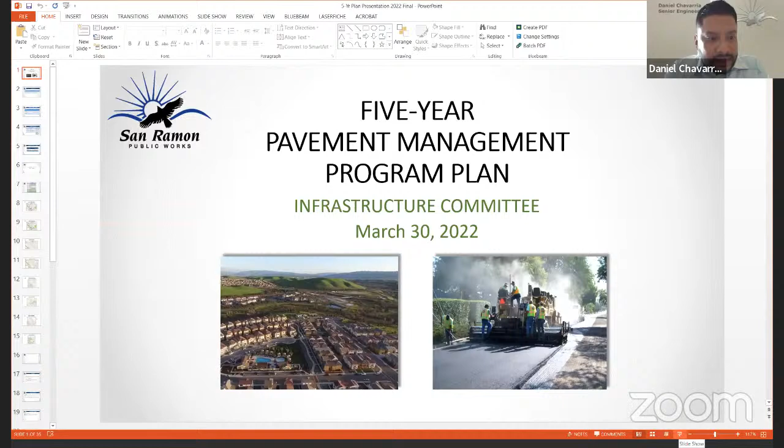Thank you, Councilmember Armstrong. This is Daniel Chavarria, Senior Civil Engineer, and with me presenting is Susie Edwards, Associate Engineer. And I'm pretty sure that Robin Bartlett will chime in as needed and any other staff member. If you can go back, Susie, to the first slide.

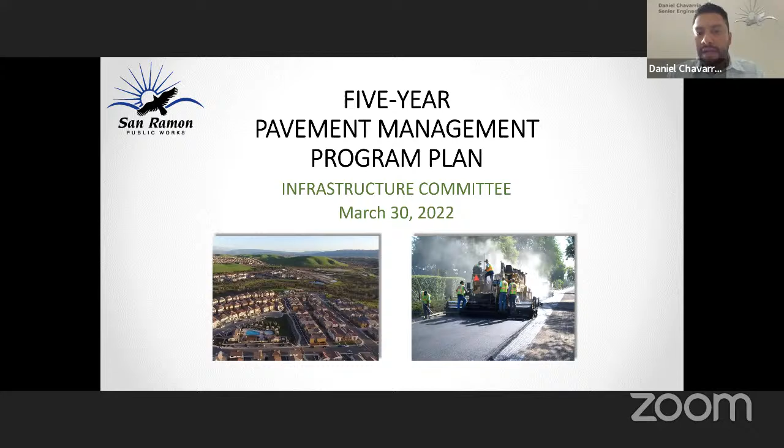Thank you. So today we're going to talk about the 5-year pavement management program plan, what we in short call the 5-year PMP. In previous years, we have started this presentation giving a quick pavement 101. But this time we're going to skip that because we have done it for the last 4 years, and since we have repeat council members in the committee, we think that we can skip that. But if we need some refresher at the end, we have some slides. So we're going to go straight to the 5-year plan. Susie, can you go next, please?

So as part of this plan, we have incorporated some opportunities that we have taken advantage of. Some of them are related to funding, specifically a cash flow from the State Transportation Improvement Program, STIP, that allowed us to do some preliminary work for future years in the last 2 years. We also got some infusion of funds from the 2019 Certificate of Participation, COP.

Another opportunity that has allowed us to get some savings is that city staff has acted as a general contractor by hiring subcontractors directly and avoiding the markups that a general contractor would charge us. That has not only provided us savings in funding, but also in time, and it has provided us flexibility, and has made the bid process a little bit more attractive for contractors in the way that they don't have to wait for subs to provide them quotes for our projects when they are very busy providing quotes for different projects all over the Bay Area.

We have also transitioned to do the plans and specifications and engineers' estimates in-house, which also has saved some funds and saved some time. We have applied new treatments for the city of San Ramon that have provided us savings, and we have taken advantage of some grants, federal and state, for our pavement program.

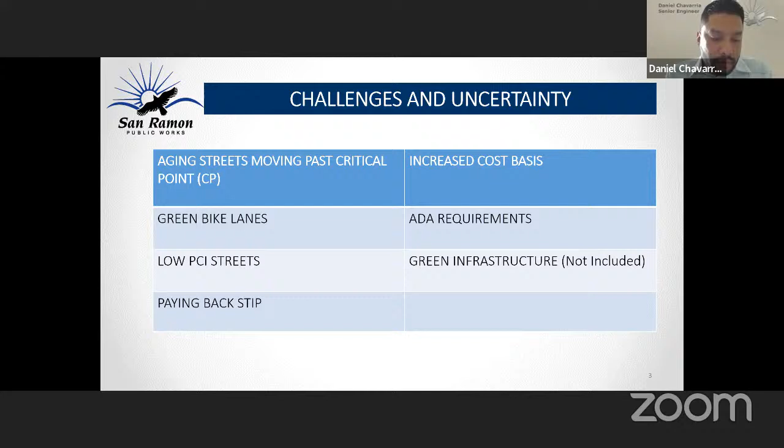And at the same time, even though the STIP was a good infusion for cash flow, we now have to pay it back. And for that, we're using Measure J, so for the next few years we won't see the Measure J funds in our paving program. Next, please.

You will see some maps further in the presentation, and here's a little bit of explanation of the legend that you're going to see. We have different categories of treatment: light maintenance, heavy maintenance, light rehabilitation, heavy rehabilitation, and reconstruction. Reconstruction is one category that we don't use in the city, except for the Alcosta Boulevard pavement project that we did last summer. That was the full depth reclamation that is also called out in this table.

But if we go one by one through the categories, when we talk about light maintenance, we typically talk about slurry seals and microsurfacing. For heavy maintenance, we talk about cape seal and a slurry seal with dig outs. Same thing with microsurface with dig outs. For light rehabilitation, we talk about overlays and rubberized cape seals with dig outs. And for heavy rehabilitation, we talk about overlays and thick mill and fill. Next, please.

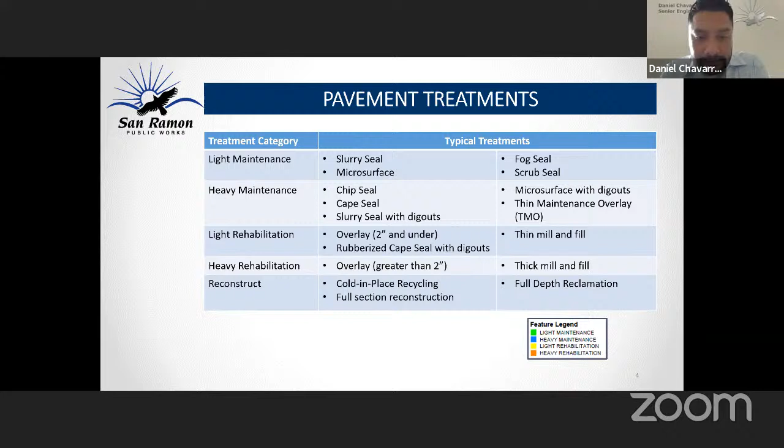The current conditions for the San Ramon pavement system, you can see in this table by functional class, arterial, parking lots, collectors, and residentials, how many centerline miles we have for each of these classes, and the areas in square feet and their participation in the overall system. You can see the percentages, where 57.6% is residential, which makes the city, of course, mainly residential, but also arterials are 26% of the system. The average current PCI for the city is 78, and you can see per functional class the PCI that we have.

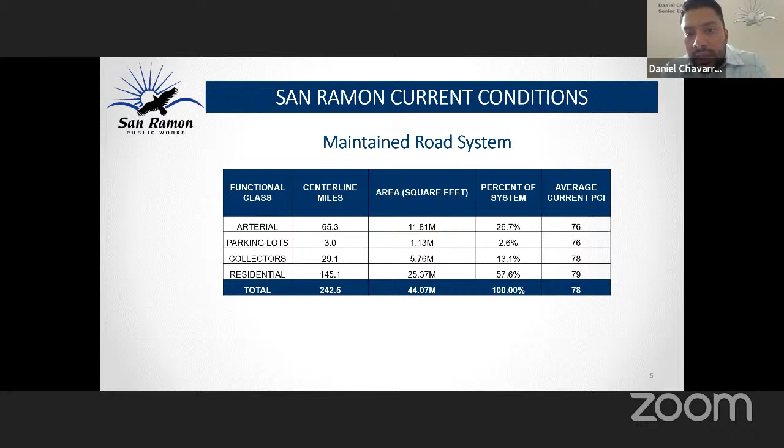Next, Susie. Thank you. Moving on with the current 5-year plan with the 2022 update. The first slide, and I know it's a lot of information in that table, is mainly funding. I want to point out that these are projections. None of these numbers are actual yet, except for 2022 and some of 2023. And as I mentioned before, we don't know yet how the increase in oil and gas prices is going to impact our program. You could say that with the gas being more expensive, we could collect more money, but there are also some measures that the state or the federal government can take that might change things around.

The two things that I want to point out in this table are that the main funding sources right now for the pavement program are gas tax, and the second one is a refuse vehicle impact fee. You can see the gas tax below the first blue cells, in the first white cells, and you can see the total gas tax there. And below that is the refuse vehicle impact fee. Those two funding sources are the main ones right now for the pavement program. No general funds. And for Measure J, we won't receive Measure J funds for a while because we're paying back the STIP loan.

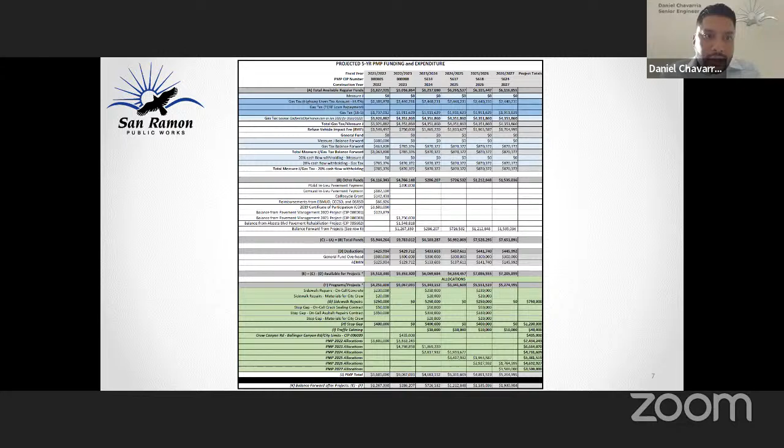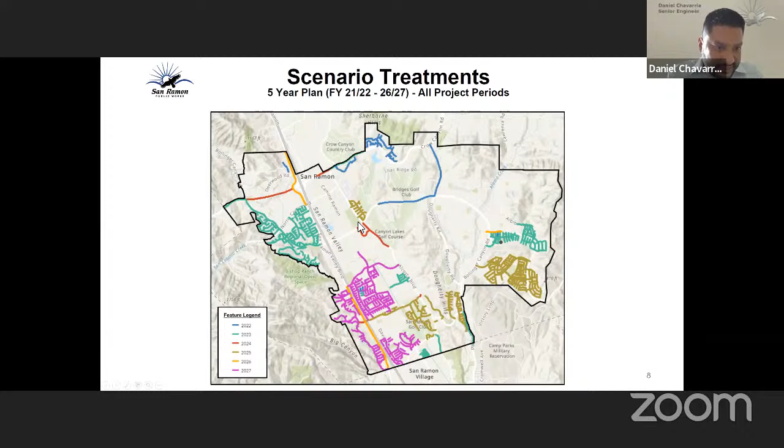Okay, thank you. Perfect. So Susie will take over here for the maps. Go ahead, Susie. I had to unmute myself. And sorry for any feedback that you guys get to listen to.

So I'm going to go over the 5-year plan, the projected periods, and pretty much we've added on 2027. There have been a few changes, but not many from the last 5-year plan. I just want you to know that we're not revamping the whole 5 years. Staff still takes into account the critical points and the neighborhood areas, as you'll see here for 2022 and 2023 on the map. Also, what we're doing now is alternating our rehab streets and our maintenance streets by year. So on even years, such as 2022, we'll be doing our rehabs, and then in 2023, we'll do the preventative

maintenance. We're also incorporating the low PCI streets. So within that 5-year plan, any street that's falling into the low PCI, staff is trying to include within the projection of streets to treat. We're also including utility work. So if there's extensive utility work, such as what Daniel was mentioning about Comcast and PG&E, we've also incorporated the in lieu fees into the plan.

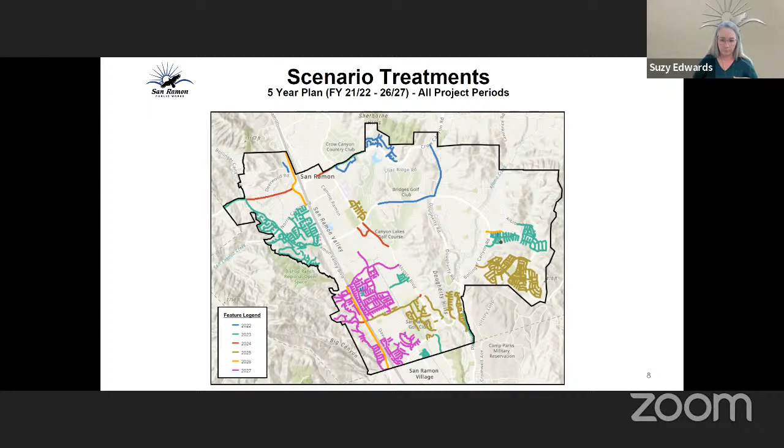And so I'm going to go on to show you in the same 5-year plan. The only thing here that we're showing is that the maintenance streets outnumber the rehab streets in the city of San Ramon. City of San Ramon really has some nice streets. And we're just grouping these maintenance streets from the rehabs.

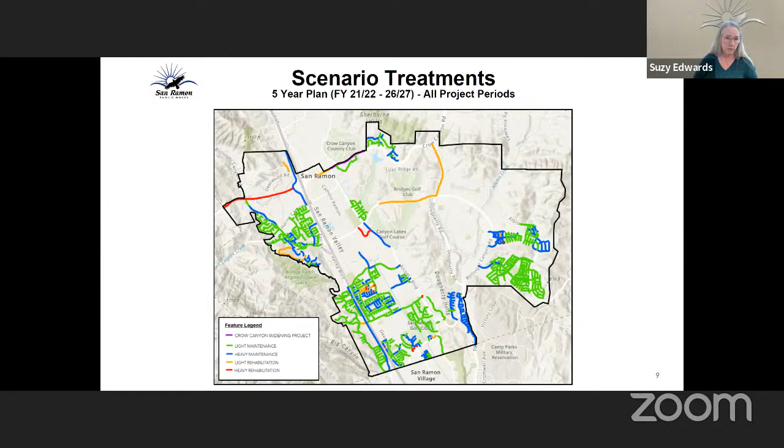So in 2022, what we've done here is we've added in the Comcast work included in the neighborhood. So we have these streets and these. The Crow Canyon widening, we're going to have to work with that, and so we may have to move these streets around. We would like to do a smaller project with the maintenance because it's a rehab year. So we would do it with maintenance and throw that out separately.

We've included some low PCI streets in here. And also in here, even though they're in the neighborhood, we're doing the 2022 with the 2023. So all the base failures that we would need to do to prepare for the 2023, we're going to take care of during the 2022. So it may look like we're only treating this street, but we're actually going to be in there doing base failure repairs and curb ramps for the 2023.

And let me show you the 2023. So 2023, we've incorporated the PG&E. Now this one was already in last year's 5-year plan, the 2023, but PG&E has done some extensive work over here, so we've included that. We also moved from 2022 to 2023 these areas. Now, Alameda County is going to do some work on Crow Canyon Road. So we're going to work with Alameda County to rehab Crow Canyon Road from Bollinger to the city limit. This will be cost effective for both, for our plan for sure.

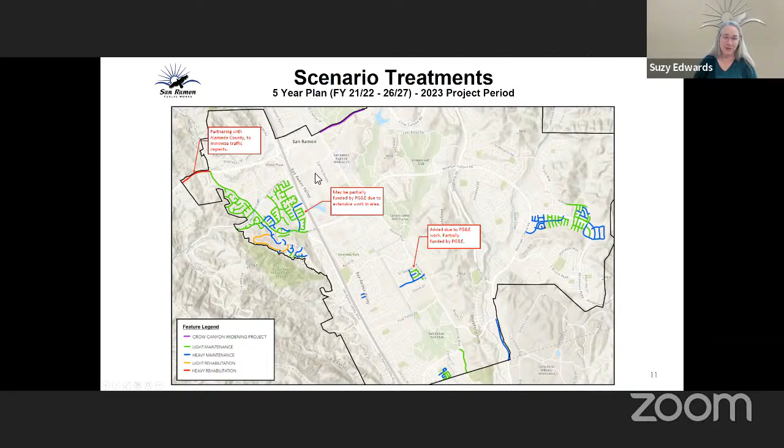So we're going to move on to 2024. So in 2024, it's the same kind of thing. The even year is going to be rehab, and the odd year, the 2025, is going to be the preventative maintenance. And I just want to point that out and reiterate, because we're trying to hit the critical point, make sure that we're getting more bang for our buck. So we're hitting that 70 PCI basically and above with our preventative maintenance to keep those streets good.

Now we have Crow Canyon Road. The added streets into this rehab was this area here, which may need to be moved because there might be some private entity that's going to do some development in the area. So we may not be able to coordinate at that time. Let's see.

And here's our 2025, which hasn't changed much, except we did move some of the streets that were in last year's 5-year plan and moved them earlier, or we're moving them to 2026, maybe 2027, to do the neighborhoods, because we want to make sure we do these neighborhoods and these areas. It's just more cost effective for the contractors to come out if they're not bouncing over and doing smaller areas.

Let's move on to 2026. And in 2026, I want to point out that this shows heavy maintenance, even though it's a rehab. But this is San Ramon Valley Boulevard, which is most likely going to end up with some sort of thin maintenance overlay or some sort of overlay or an inlay. Yeah, there's, particularly on the southernmost section, the elevation between San Ramon Valley Boulevard and the freeway below, I think contributes to some subsidence because there's long longitudinal cracks and some sideways dislocations. That may take a little extra engineering to help support it.

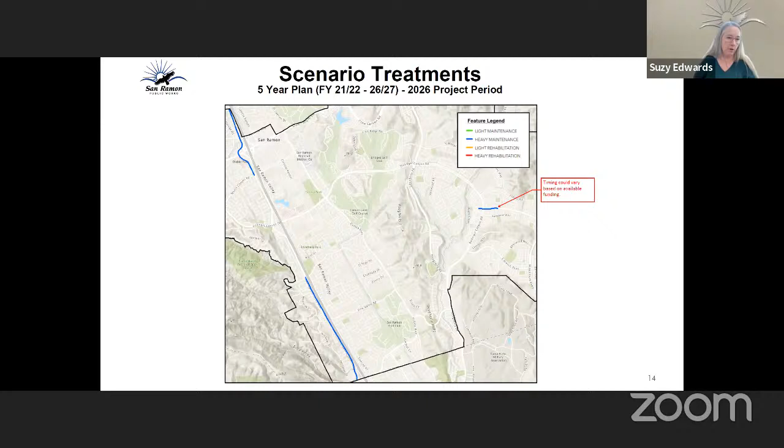Moving on. And then 2027, we have this whole area for maintenance. Now, this was just moved forward. Most of this area was already in the 5-year plan. It's just been moved forward to 2027 because there'll be a lot of base repairs and such going on. Also, that's why it says here the timing could vary, combined with other projects.

So in case something happens in our 2026, we throw in the 2027, making sure when we do our testing of the pavement to see if it's structurally adequate or not. So sometimes a 2027 street we'll have to move to 2026. We may not be able to do a rubber cape on something and have to do an overlay. That would be an example.

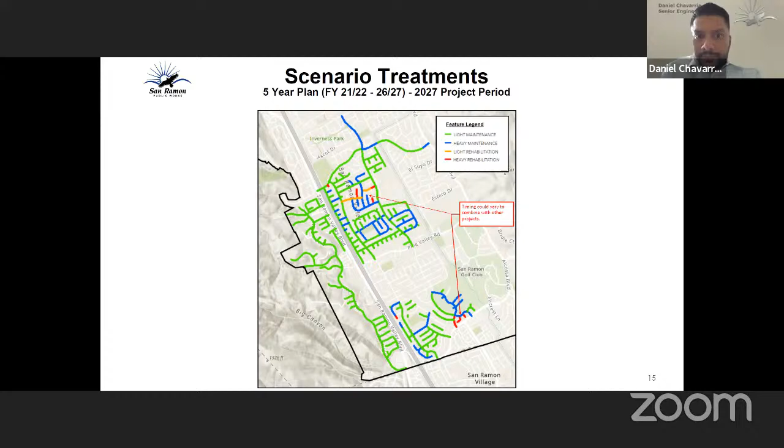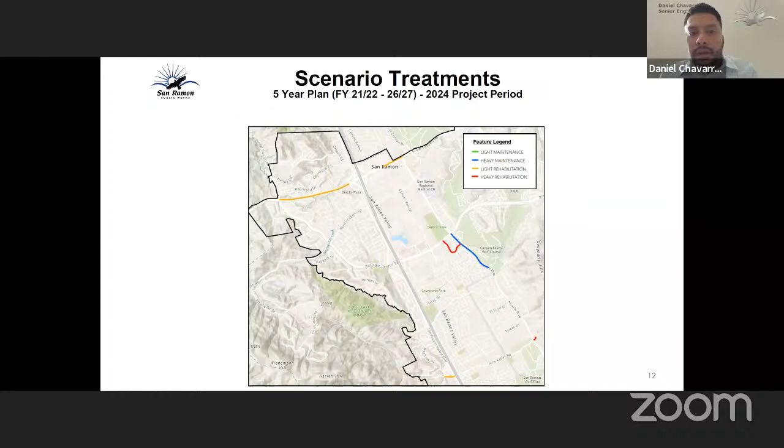Okay. I would just like to point out, Susie, if you can go back, let's say to 2024. So as Susie mentioned, in 2024, this is what we have planned to completely finish. But at the same time, as part of this project, the contractor that gets awarded the contract not only would treat this street, but they would also do the base repairs of the streets in 2025. Can you show that, Susie, please? So that is all this area.

Typically, before we started implementing this type of plan, for a project like the one shown in 2025, there is a maintenance contractor, let's say a slurry seal microsurfacing type of contractor. Typically, what they would do is subcontract the type of contractor that worked in the previous year to do all the base repairs. And they charge us a markup for that.

But not only that, it makes their bidding process a little bit more complex, because now they have to coordinate with that contractor to get a quote, apply the markup and charges, and probably show up at the bid opening, see who else is bidding, and at the moment just increase or decrease their costs because they know who's bidding with them. That's the reason why all contractors present their bids exactly 2 minutes before the due time. But by us doing the base repairs the previous year, and also the curb ramps, we take that element out of the bids.

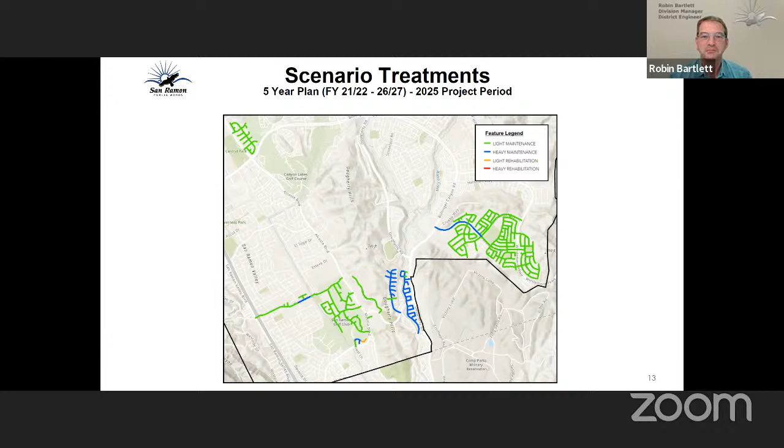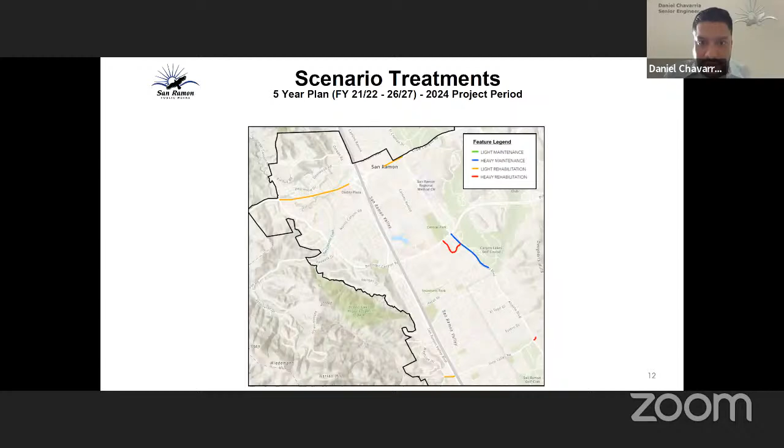Okay. I want to just point out that, and Susie, if you don't mind going back to 2022, this year's project. So talking about the bike lanes, as part of the COP funds that we receive, we incorporated the bike lanes for Dougherty Road and Bollinger Canyon. Right. So the reason these two streets, pavement wise, we had these streets scheduled for next year and even one year later. However, we wanted to coordinate with the bike lanes because the funds expire.

We have to install these bike lanes, and we didn't want to pay one time for the bike lanes, come back a year or two later to do the pavement and pay again for the bike lanes and spend quite some money. So that's why we pushed it forward. However, and I want to point this out, there's always a trade-off.

Nothing is free. So the challenge we face now, and that we're working on, is that with the Crow Canyon Road widening project starting this year, we're definitely going to have an area in San Ramon that is going to be under construction in different streets. And we are coordinating with that project. The contractor for the Crow Canyon widening is working on the schedule. Once we have the schedule, we're going to set the schedule for these other two streets in a way that we impact traffic as minimally as possible.

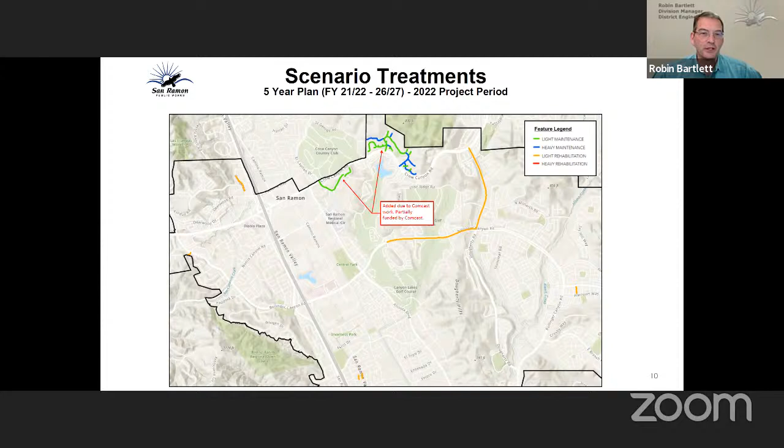And just to point out, you'll see some evolution in these bike lane configurations over time. This question also arose on Crow Canyon Road, as you may recall, when we were awarding that project. And that's one of those elements where things like delineators can be installed at a later date. But we want to do the fundamentals with these projects. Good.

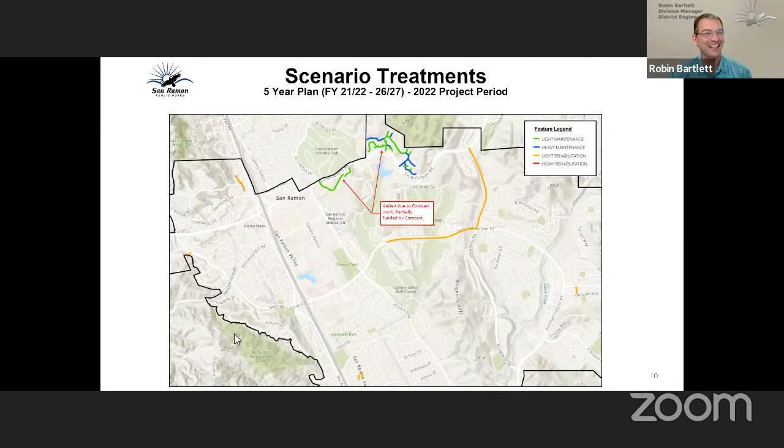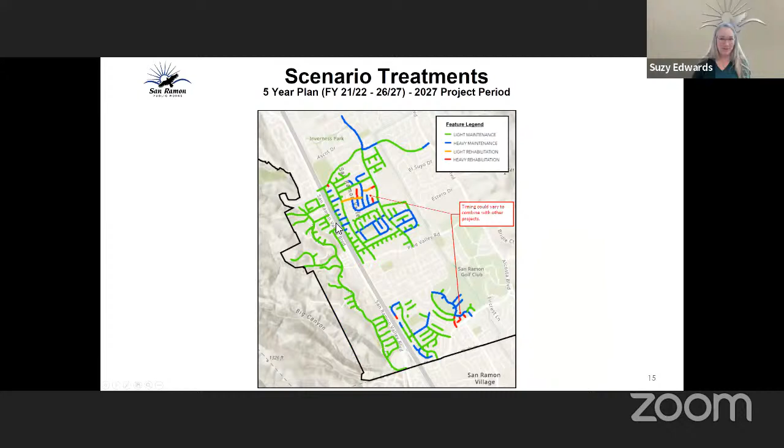Can you go back to the graph that shows the PCI and how it deteriorates over years? We've got to get to that yet. Oh, we haven't gotten to it yet. Okay. All right. I thought we passed it. Suzy, do you want to continue? I think you left it on 2026, 2027. That's where I left it. Yeah. Okay. That's where we are. Yeah, we've talked about this one. Okay, there we go.

Interesting thing. Robin knows and Maria knows I've been with you guys for almost 20 years doing this, and the graph looks the same. It always shows doom and gloom, kind of like the financial graph. And somehow, fortunately, if you went back far enough, you'd see that we managed to stay above 77 year after year after year. Is that pretty much true, Robin? Yes. And for this year, there are two factors that are helping us bump back up from 78 to 79 and then stay there: the injection of the STIP funds and the COP funds.

That STIP fund was a joint funding deal that helped replace lost Measure J cycle 3 and 4, I believe it was, for the bridge, and then also gave us a surge of funding based off of that Measure J money to help us do preventative maintenance now while it was at that critical point. And so we see this bump coming up now, but of course we lose the money in the back end, which contributes to this decline.

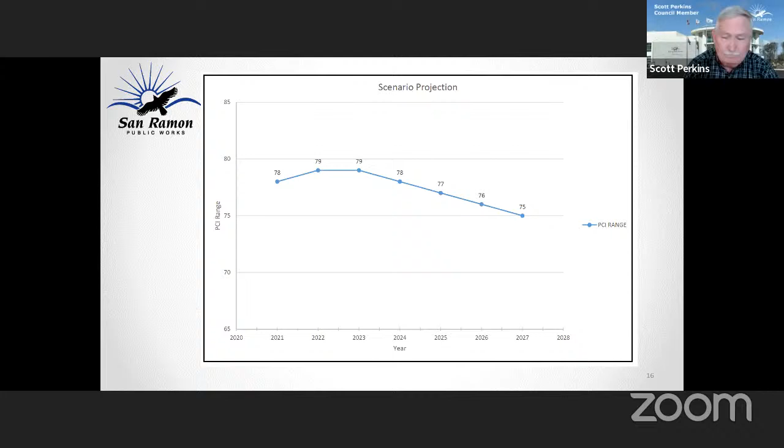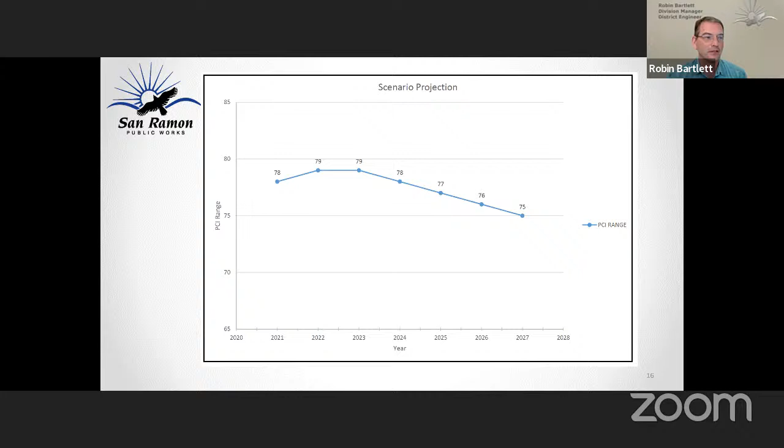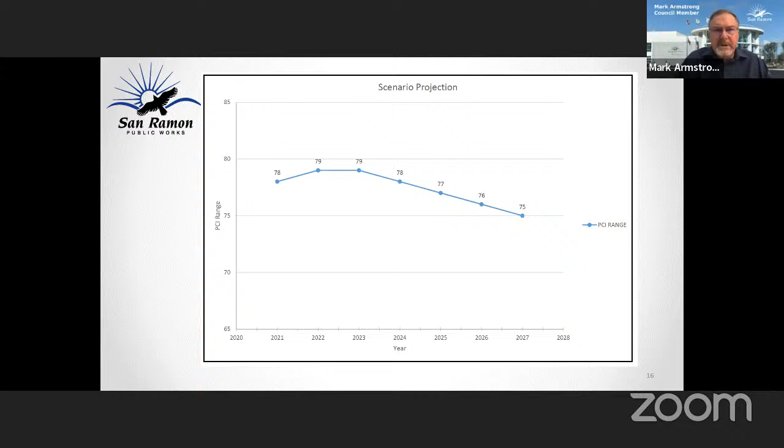Yeah, it's worked out quite well. I think, you know, the other advantage is we're saving on this consultant design cost. And so that more or less compensates for our staff time. And then the net benefit to the city is from all the other savings we see on various elements of the construction. And how many more slides do we have? I think we have 4 more. Okay. 4 or 5 more.

So, some of the challenges in a 5-year plan definitely is keep treating the low PCIs in every single plan, because as I mentioned, low PCI streets are the most expensive streets to treat. In this specific 5-year plan, we're talking about over $7.5 million in expenses. Other elements that reduce funds from the PMP is the curb ramp construction, the sidewalk repairs, the bike lanes, the green infrastructure, and right now we're talking about inflation, changing the standards, changes in funding, things that are out of our control. Next, please.

We have implemented, as we said, cost-saving measures that we plan to continue implementing, like getting bids for asphalt and preventive treatment separate, also doing the concrete work ahead of time and directly with the contractors to avoid markups and have more flexibility in timing. We're going to continue evaluating new pavement technologies. And one of them, of course, has been the rubberized Cape Seal that has provided us a lot of savings. And we're going to share a little bit more in the next slide. And finally, being more flexible with the specifications of work hours. For example, Alcosta, and also closing some lanes to allow the contractor to move faster. That provides us better bids and also a faster construction time, so if we know already that it's going to impact the community and traffic, we want to make it as short as possible.

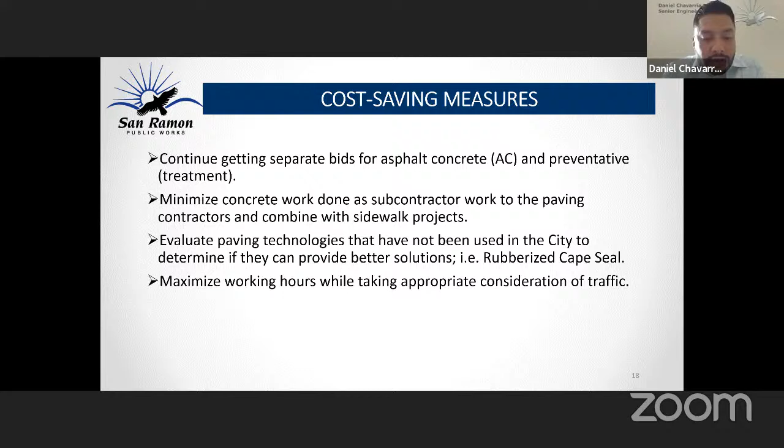Next, please. Going back to the rubberized Cape Seal, we have seen some cost savings in the range of 40 to 45% compared to overlays. And we could reduce the cost of overlays by 20 to 25%. That's what is allowing us to do more streets. It doesn't apply to every street that requires an overlay, though. It's just we have found candidates and we have implemented there, but there are some streets where definitely the best treatment is an overlay, mainly because there are some structural deficiencies and the rubberized Cape Seal would not cut it. We need to add more asphalt. Next, please.

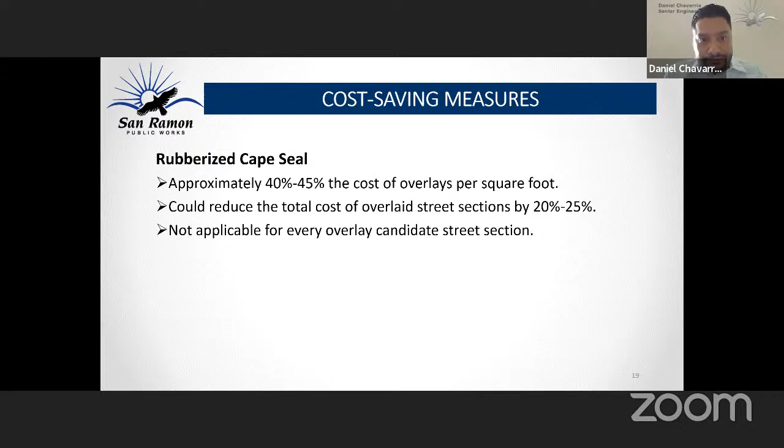Yeah, and let me just dive in here because I'd talked about this last year and suggested that we have that floor of 75. And this year I'm talking about more of a range because I know there is that desire to keep it as high as possible. And also perhaps it gives a little bit more clarity to the intent here. The intent is to keep the roads as good as possible, because as good as possible also means the maintenance is as cheap as possible. But it does make sense to have an operating range. We want to stick to that critical point methodology, which means having the room to maneuver in a range so that you're doing streets that are close to that critical point as opposed to just sticking to an arbitrary number. So this range would keep our streets in the good category and give us some flexibility while achieving that goal of keeping them as good as possible.